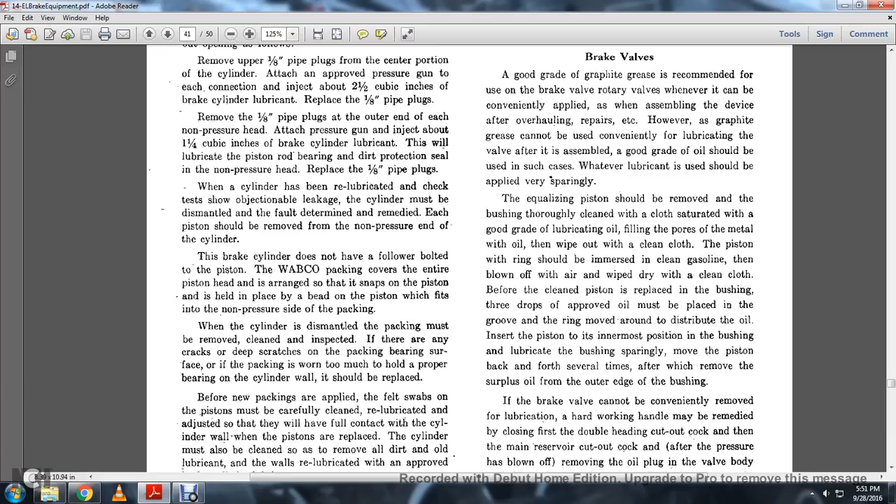Each of the pistons should be removed from the non-pressure end of the cylinder. This brake piston does not have a follower bolted on; the packing covering the entire piston head is arranged so that it snaps onto the piston and is held in place by a bead on the piston which fits into the non-pressure side of the packing.

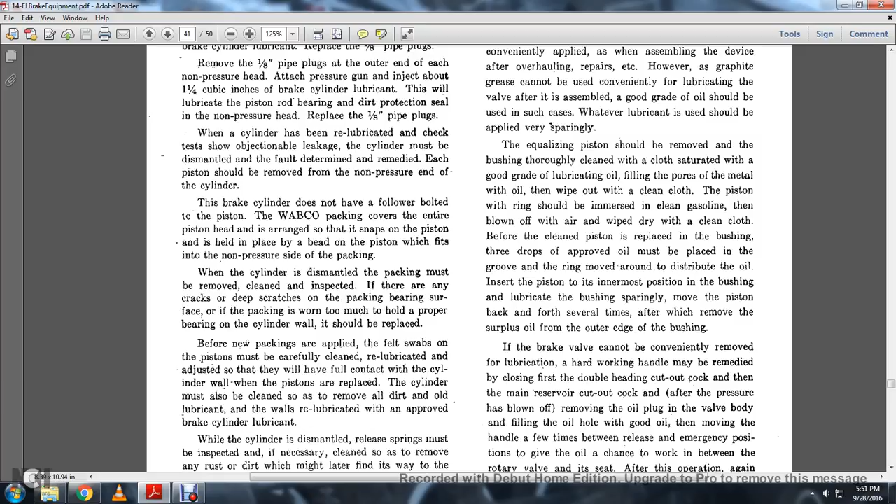When the cylinder is dismantled, the packing must be removed, cleaned, and inspected. If there are any cracks or deep scratches in the packing bearing surface, or if the packing is worn too much to hold the proper bearing on the cylinder wall, it should be replaced.

Before new packings are applied, the felt swabs on the pistons must be carefully cleaned and re-lubricated so that they will be in full contact with the cylinder wall.

When the pistons are replaced, the cylinder must be cleaned to remove all dirt and old lubricant, with the walls re-lubricated with an approved brake cylinder lubricant.

When the cylinder is dismantled, the release springs must be inspected and, if necessary, cleaned to remove any rust or dirt which might later find its way to the cylinder walls. If the springs show any rust spots, they should be coated with an approved rust preventive after cleaning.

Dirty strainers should be taken to the shop for inspection, cleaning, and reconditioning, and replaced as necessary. If the seal rings are not tight on the piston rods, they may need to be replaced.

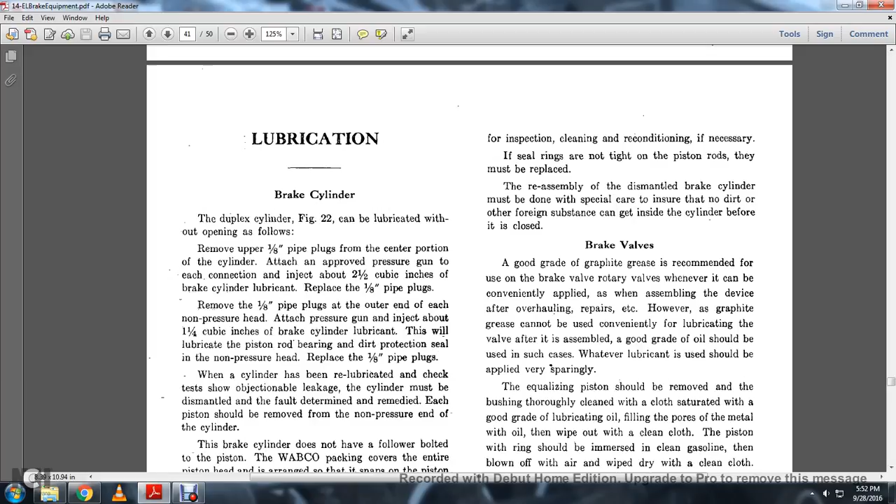In reassembly of the dismantled brake cylinder, special care must be taken to ensure that no dirt or other foreign substances can get inside the cylinder before it is closed.

The brake valve: a good grade of graphite grease is recommended for use on the brake valve rotary valves whenever it can be conveniently applied, as when assembling the device after overhauling and repairs. However, this graphite grease cannot be used conveniently for lubricating the valve.

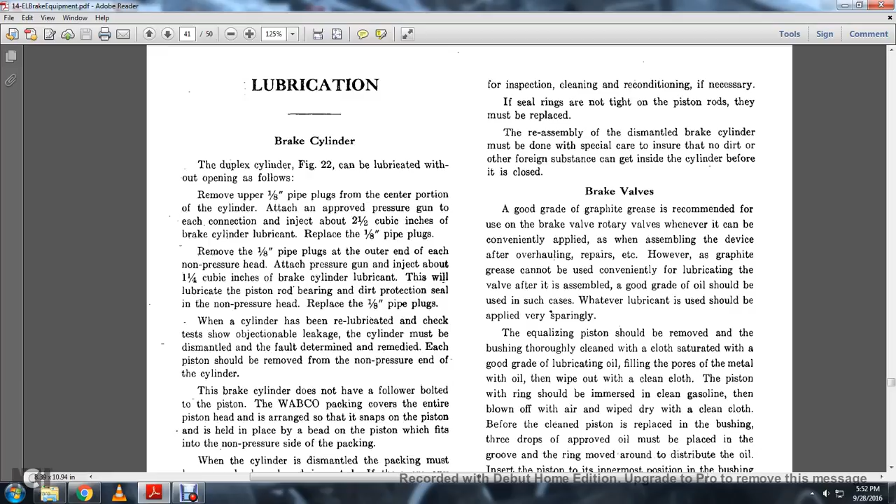In the rotary valve assembly, a good grade of oil should be used. Whatever lubricant is used should be applied very sparingly. The equalizing piston should be removed and the bushing thoroughly cleaned with a cloth saturated with a good grade of oil.

Lubricate and fill the pores of the metal with the oil while wiping out and cleaning with a cloth. The piston and ring shall be immersed in clean gasoline, blown off with air, and wiped dry with a clean cloth before the clean piston is replaced.

Within the bushing, three drops of approved oil must be placed in the groove, and the ring moved around to distribute the oil.

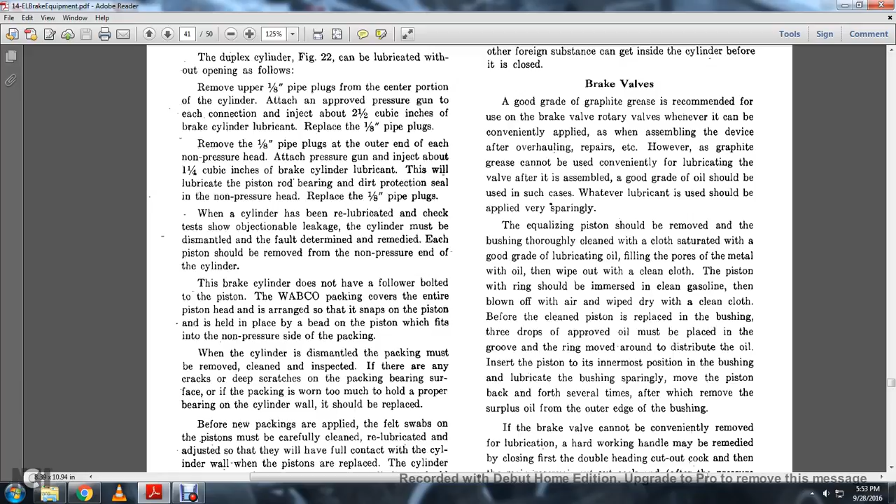Insert the piston to its innermost position in the bushing, lubricated with the oil, and sparingly move the piston back and forth several times, after which remove the surplus oil from the outer edge of the bushing. If the brake valve handle works hard and cannot be conveniently removed for lubrication, this may be remedied.

Close the first double heading cutout cock, then the main reservoir cutout cock, and after the pressure has been blown off, remove the oil plug from the valve body, filling the oil hole with a good oil. With the handle removed, move it a few times between the release and emergency positions to give the oil a chance to work in between the rotary valve and the seat. After this operation, again fill the oil hole and replace the oil plug.

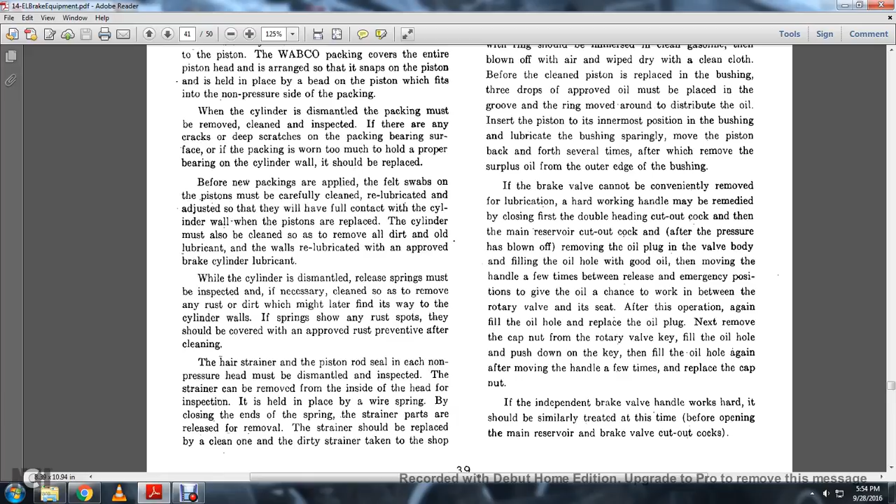Next, remove the cap nut on the rotary valve key, fill the oil hole, push down the key, then fill the oil hole again. After moving the handle a few times, replace the cap nut. If the independent brake valve handle works hard, it should be similarly treated before opening the main reservoir and brake valve cutout cocks.

All cleaning and oiling should be done at a bench by a competent man, since the liability of damaging the internal parts of the valve is least. Any attempt to take the valve apart while still on the locomotive almost certainly results in a large percentage of valves being injured by careless handling or dirt getting inside the valve.

Repairs, if necessary, should be returned to our shop for this purpose. Our facilities for doing this work and maintaining standards are the best. We can therefore do it more quickly and accurately, and guarantee better satisfaction than if handled by other shops not so well equipped.

Furthermore, it is of the utmost importance that the manufacturer's standard not be departed from for the other parts of the apparatus, in order that they be perfectly interchangeable.

The proper specified cleaning period of the distributing valve is best determined by each particular case, with careful inspection. Where conditions are severe and the distributing valve is exposed to extremes of weather, dirt, and so on, shorter intervals will be required for oiling and testing. Where conditions are more favorable, but under the most severe conditions, the interval should not be larger than 3 months.

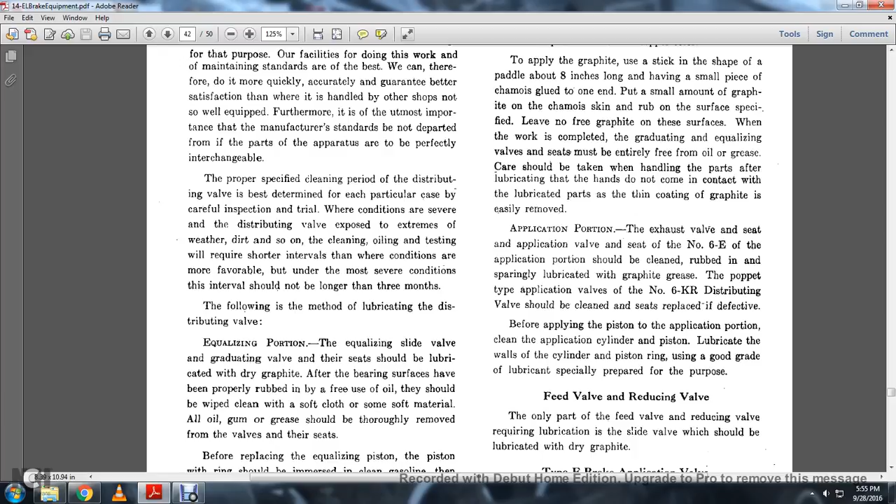The following is the method of lubrication of the distributing valves. Equalizing portion: the equalizing slide valve, the graduating valve, and their seats shall be lubricated with dry graphite after the bearing surfaces have been properly rubbed with free use of oil, then wiped clean with a soft cloth or similar material.

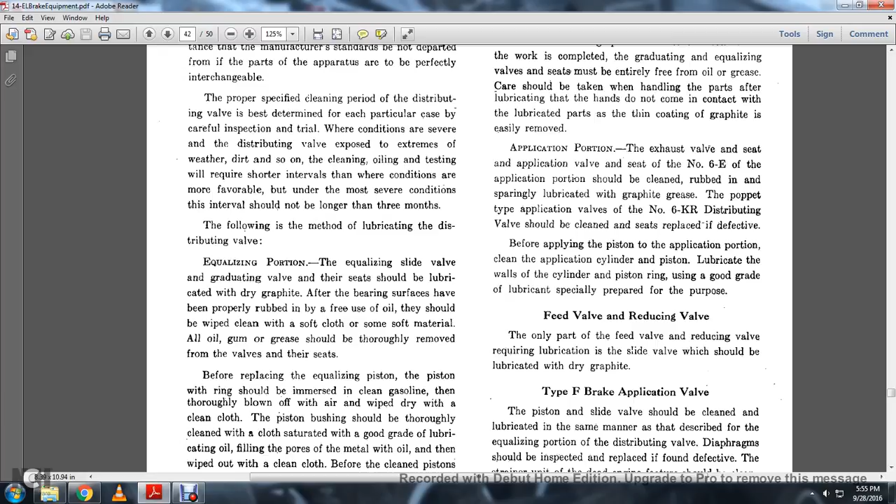Oil, gum and grease should be thoroughly removed from all the valves and their seats. Before replacing the equalizing piston, the piston ring should be immersed in clean gasoline, then thoroughly blown off with air and wiped dry with a clean cloth.

The piston bushing should be thoroughly cleaned with a cloth saturated with a good grade of lubricating oil, filling the pores of the metal with oil, and then wiped with a clean cloth.

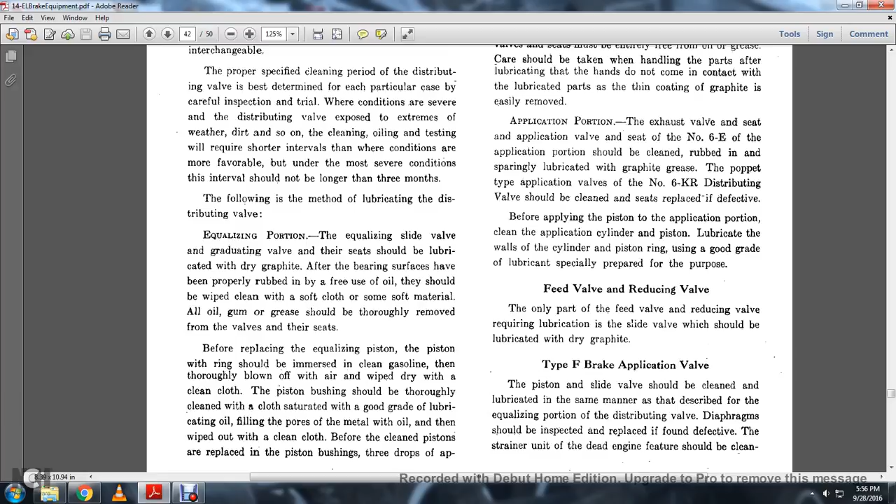The face of the graduating valve, both upper and lower face of the equalizing valve, and the equalizing valve seat, and the upper portion of the bushing where the equalizing valve spring bears, should be lubricated with a high grade of very fine, dry, pure graphite, rubbing it in until the parts show a dark copper color.

To apply the graphite, use a stick shaped like a paddle, about 8 inches long, with a small piece of chamois glued to one end. Put a small amount of graphite onto the chamois skin and rub it on the surface, taking care to leave no excess graphite on the surfaces.

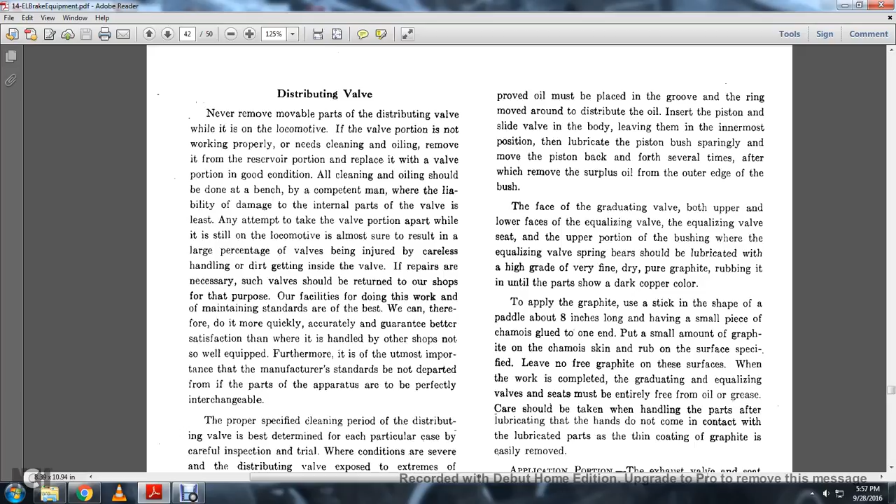When the work is completed, the graduating and equalizing valve seats must be entirely free of oil and grease. Care should be taken so that when handling the parts, the hands do not come in contact with the lubricated parts, as the thin coating of graphite is easily removed.

The application portion: the exhaust valve and its seat, and the application valve with the seat of the number 6E application portion, should be cleaned and sparingly lubricated with graphite grease. The poppet type of application valve with the number 6-KR distributing valve should be cleaned, or the seat replaced if defective, before applying the piston of the application portion.

Clean the application cylinder and piston. Lubricate the walls of the cylinder, piston, and piston rings, using a good grade of lubricant specially prepared for the purpose.

The feeding valve and reducing valve: the only part of the feed valve and reducing valve requiring lubrication is the slide valve, which should be lubricated with dry graphite. The Type F brake application: the piston and slide valve should be cleaned and lubricated in the same manner as described for the equalizing portion.

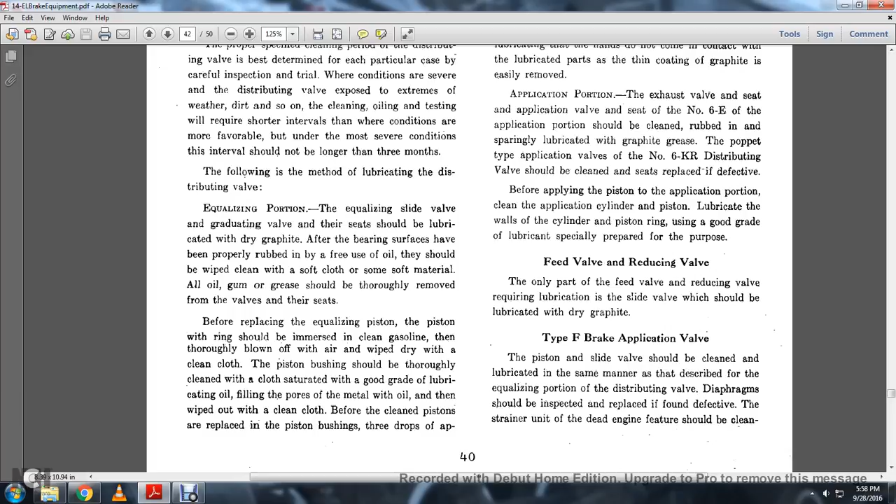The distributing valve diaphragm should be inspected and replaced if found defective. The strainer and the unit of the dead engine feature should be cleaned, and also the double check valves. If the double check valve end seals are defective, they should be replaced.

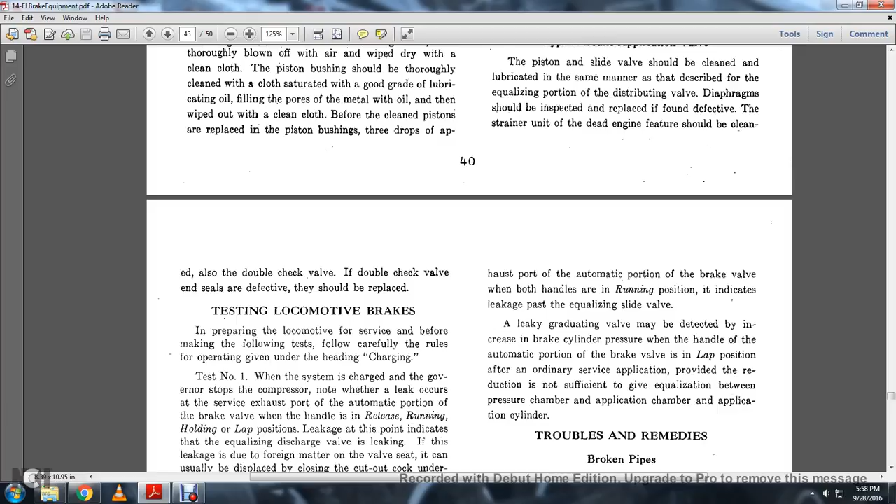Testing locomotive brakes. In preparing a locomotive for service, before making the following tests, carefully follow the operating rules given under the heading of charging.

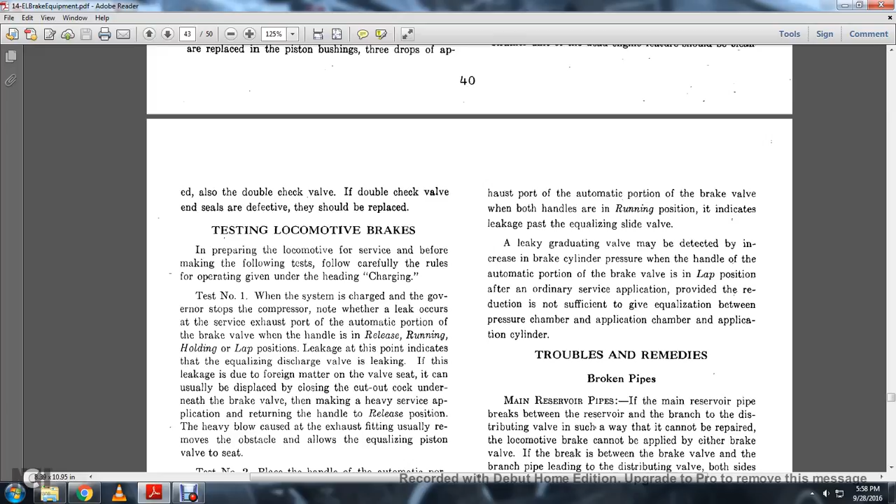Test number 1: the system is charged and the governor stops the compressor. Note whether leakage occurs at the service exhaust port of the automatic portion of the brake valve, with the handle in release, running, or lap position. Leakage at this point indicates the equalizing discharge valve is leaking. If due to foreign matter on the valve seat, it can usually be dislodged by closing the cutout cock underneath the brake valve, making a heavy service application, then returning the handle to release position. The heavy blow through the exhaust usually removes the obstacle and allows the equalizing piston valve to seat properly.

Test number 2: place the handle of the automatic portion of the brake valve in service application position. Allow it to remain until brake pipe pressure is entirely exhausted, as indicated by the gauge, then place the handle in lap position. Note if there is leakage past the rotary valve, which will be indicated by a blow.

An increase in brake pipe pressure will cause a blow at the service exhaust port. It will increase the equalizing reservoir pressure, causing the equalizing reservoir gauge to register an increase, raise pressure in the application chamber of the distributing valve, and cause an increase in brake cylinder pressure or an intermittent blow at the safety valve.

Test number 4: if after a service application the locomotive brakes release, air leaking from the application cylinder pipe, leakage at the brake cylinder exhaust port of the distributing valve while the locomotive brakes are applied, indicates a leaky exhaust valve. An increase in pressure above that put into the brake cylinder at the time of application, blowing at the safety valve, should indicate that the application valve is leaking, and should there be a blow at the

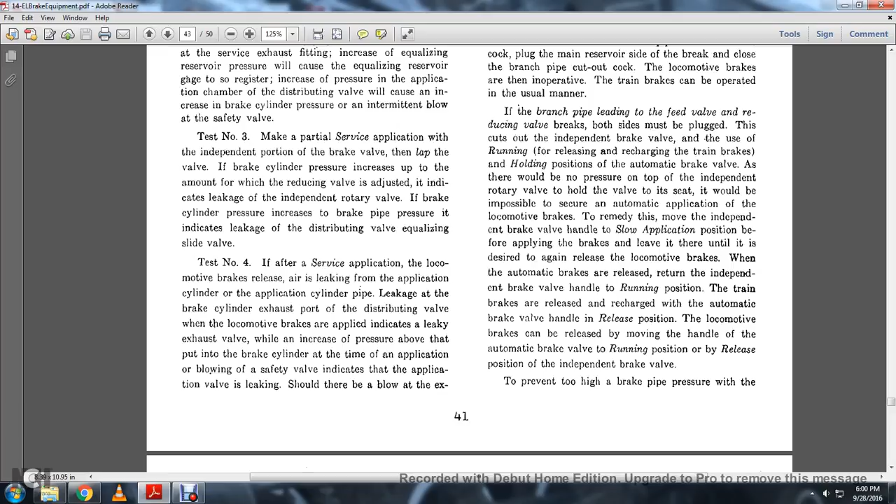exhaust of the automatic portion of the brake valve when both handles are in running position, it indicates leakage past the equalizing slide valve.

A leaking graduating valve may be detected by an increase in brake cylinder pressure after placing the handle of the automatic portion of the brake valve in lap position following an ordinary service brake application, provided the reduction is insufficient to give equalization between the pressure chamber and the application cylinder.

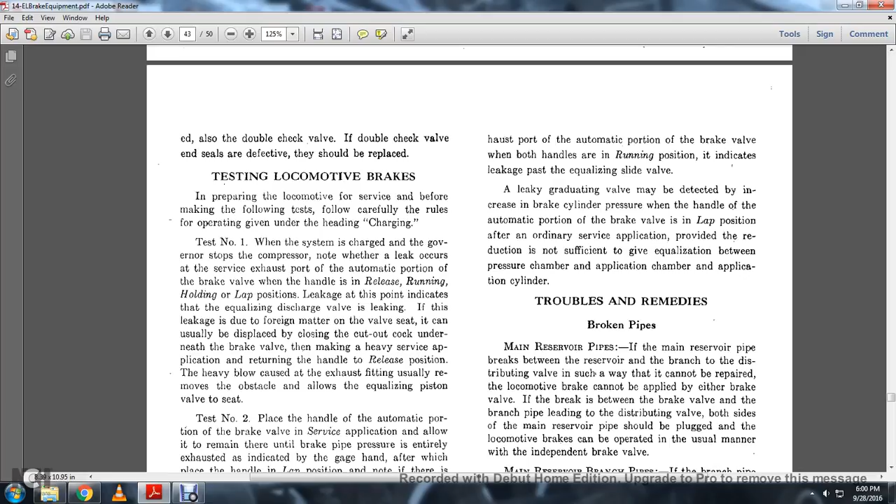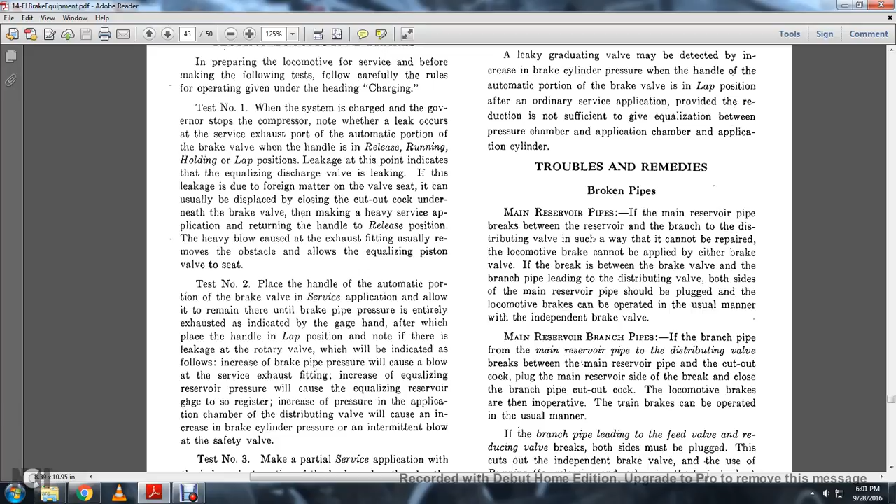Troubles and remedies: broken pipes. The main reservoir pipe: if the main reservoir pipe breaks between the reservoir and the branch to the distributing valve in such a way that it cannot be repaired, the locomotive brake cannot be applied by either the automatic or independent brake valve. Both sides of the main reservoir pipe should be plugged, and the locomotive brakes can then be operated in the usual manner with the independent brake valve.

The main reservoir branch pipe: if the branch pipe from the main reservoir pipe to the distributing valve breaks between the main reservoir pipe and the cutout cock, plug the main reservoir side of the break and close the branch pipe cutout cock. The locomotive brakes are then inoperative, but the train brakes can be operated

in the usual manner. If the branch pipe leading to the feed valve and reducing valve breaks, both sides must be plugged. This cuts out the independent brake valve and the use of the running position for release and recharging of the train brakes.

With the automatic brake valve in hold position, there would be no pressure on top of the independent rotary valve to hold the valve on its seat, making it impossible to secure an automatic application of the locomotive brakes.

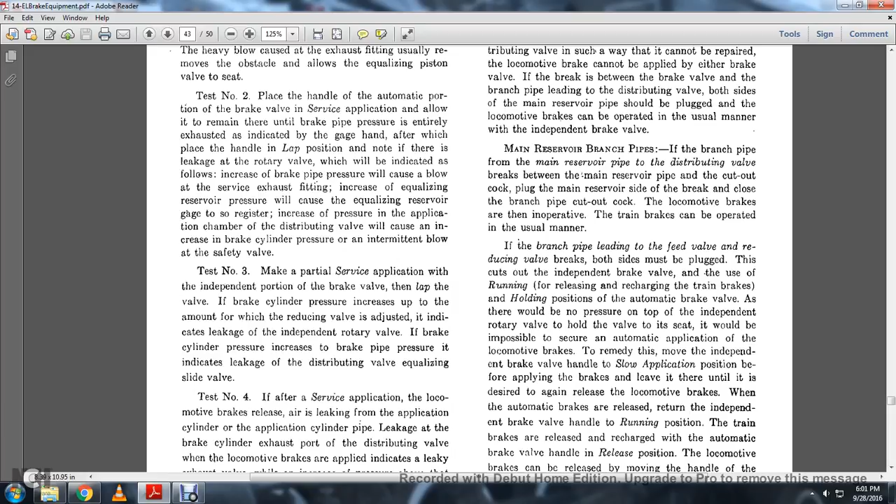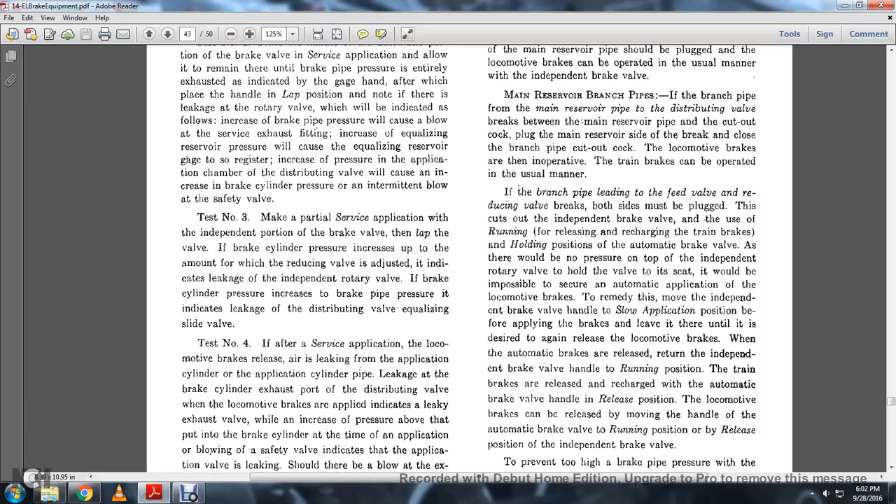To remedy this, move the independent brake valve handle to slow application position before applying the brakes, and leave it there until it is desired again to release the locomotive brakes. When the automatic brakes are released, return the independent brake valve handle to running position. The train brakes are released and recharged with the automatic brake valve handle in release position. The locomotive brakes can be released by moving the handle of the automatic brake valve to running or release position, or by the independent brake valve.

To prevent too high brake pipe pressure with the automatic brake valve handle in release position, the compressor must be stopped by means of the control switch.

If the break occurs between the reducing valve and the branch piping leading to the feed valve, plug both sides of the pipe. This cuts out the independent brake valve but does not interfere with the handling of the locomotive and train brakes using the automatic brake valve, except that the independent brake valve must be manipulated as described in the preceding paragraph.

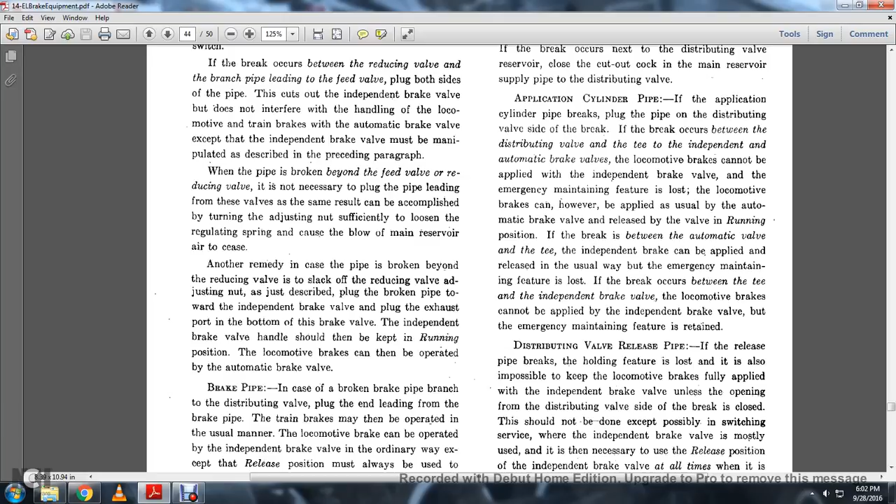When the pipe is broken beyond the feed valve or the reducing valve, it is not necessary to plug the pipe leading from the valves. The same result can be accomplished by turning the adjusting nut sufficiently to loosen the regulating spring, to cause the blow of the main reservoir air to cease. Another remedy in case the pipe is broken beyond the reducing valve is to slack off the reducing valve with the adjusting nut, as just described.

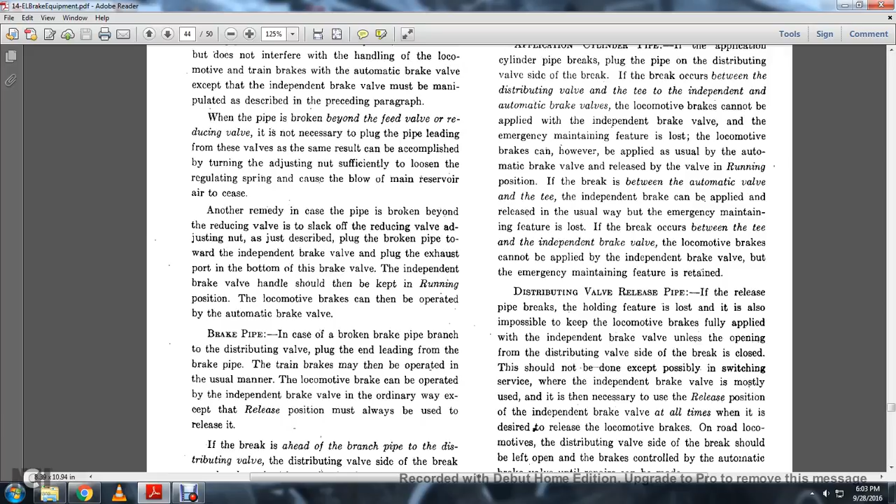For the brake pipe, in case of a broken brake pipe branch, plug the distributing valve at the end leading from the brake pipe, and the train brakes may be operated in the usual manner. The locomotive brakes can be operated with the independent brake valve in the ordinary way, except that the release position must always be used to release it.

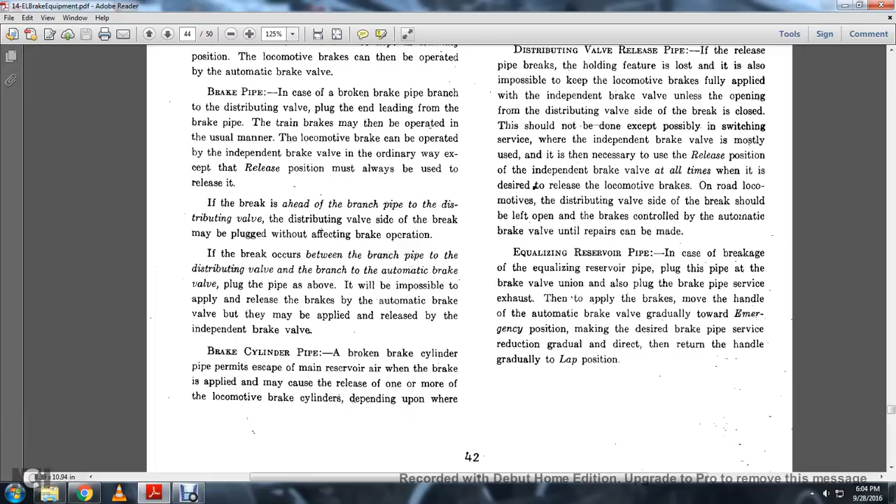Brake cylinder pipe: a broken brake cylinder pipe permits the escape of the main reservoir air pressure for the brake, and may cause the release of one or more locomotive brake cylinders depending on where the break occurs.

If the break cannot be repaired, close the cutout cock of the pipe leading from the break to the distributing valve, or close the cutout cock of the main reservoir supply pipe to the distributing valve as necessary.

Application cylinder pipe: if the application cylinder pipe breaks, plug the pipe on the distributing valve side of the break. If the break occurs between the distributing valve and the tee to the independent and automatic brake valve, the locomotive brakes cannot be applied with the independent brake valve, and the emergency maintaining feature is lost.

The locomotive brakes can, however, be applied usually by the automatic brake valve, released by the valve in running position. If the break is between the automatic valve and the tee, the independent brake valve can be applied and released in the usual way, but the emergency maintaining feature is lost.

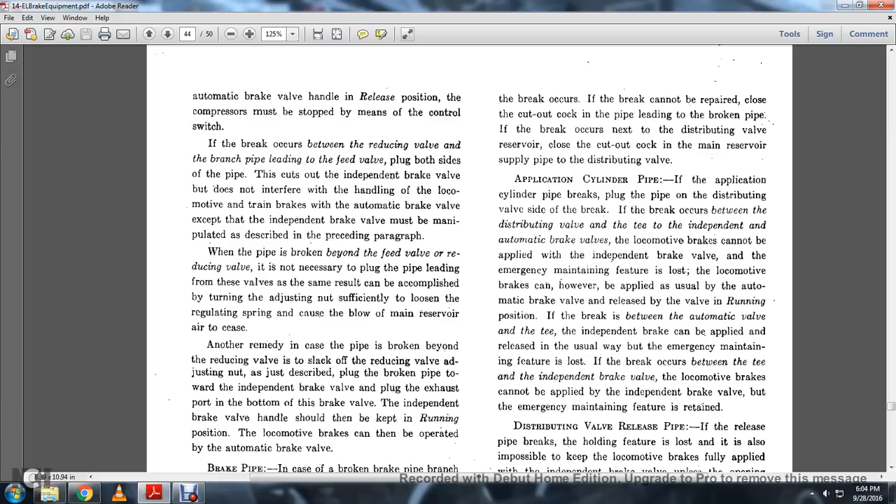If the break occurs between the tee and the independent brake valve, the locomotive brakes cannot be applied with the independent brake valve, and the emergency maintaining feature is retained.

Distributing valve release pipe: if the release pipe breaks, the holding feature is lost, and it is also impossible to keep the locomotive brakes fully applied with the independent brake valve unless the opening on the distributing valve side of the break is closed. This should not be done except possibly in switching service, where the independent brake valve is mostly used.

It is necessary to use the release position of the independent brake valve at all times when it is desired to release the locomotive brakes. On the road locomotive, the distributing valve side of the break should be left open, and the brakes should be controlled by the automatic brake valve until repairs can be made.

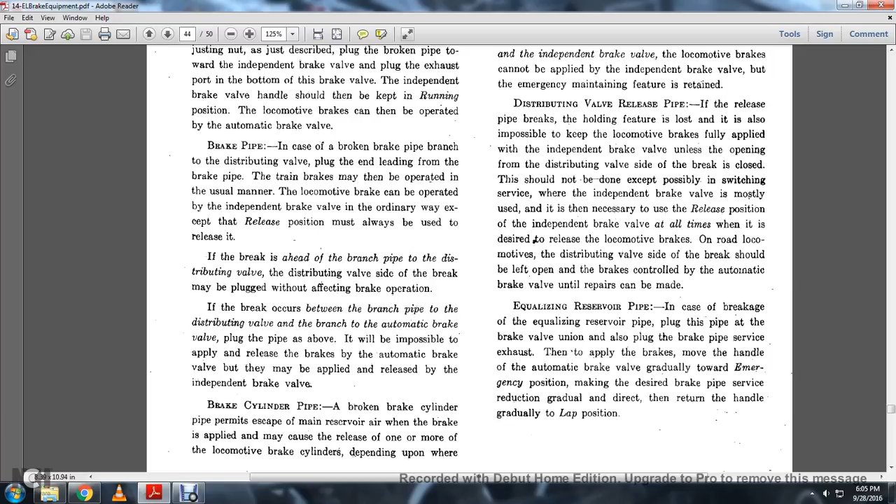For the equalizing reservoir pipe, in case of breakage, plug the pipe at the brake valve union. Also plug the brake pipe service exhaust, then apply the brakes and move the handle of the automatic brake valve gradually toward the emergency position, making the desired brake pipe service reduction gradually. Then return the handle gradually to the lap position.

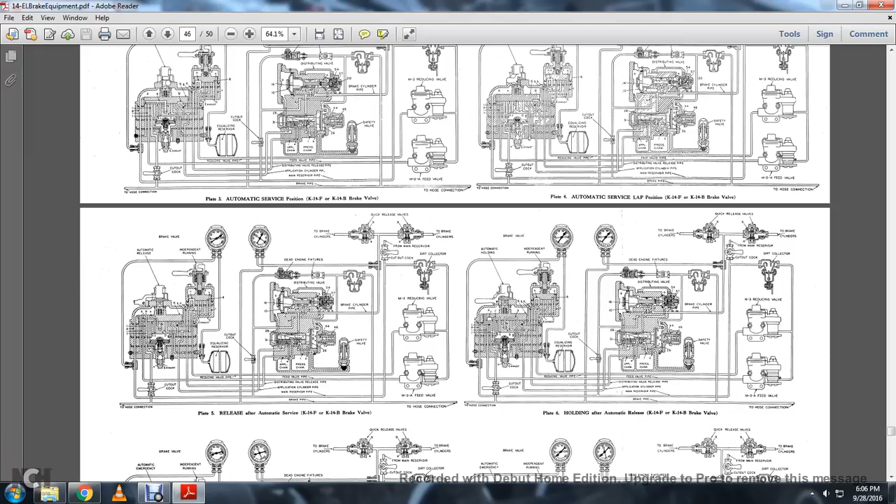And then there are the couple diagrams, like the release and running position, automatic service position, automatic service lap position, release, automatic service, release holding, automatic release, emergency position, emergency lap position, independent application position, independent lap position, independent release position, independent release, independent application.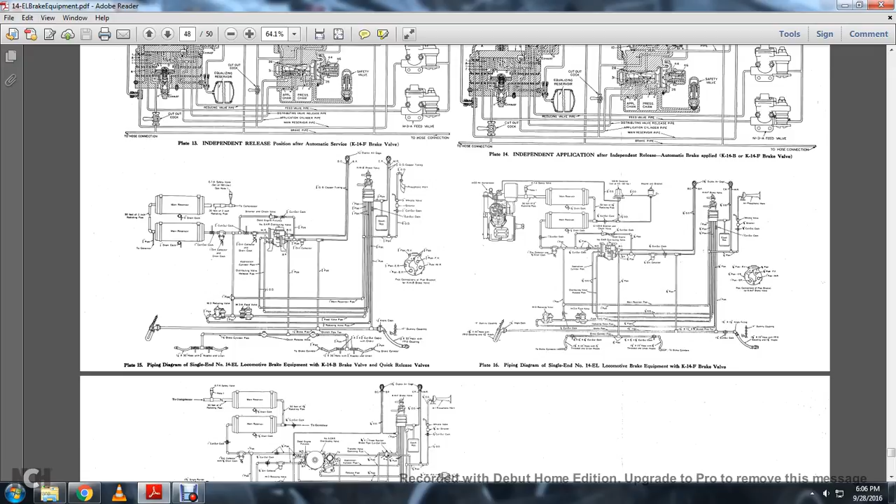Another diagram, I'm planning on going over these in another video, but not for this one, not now.

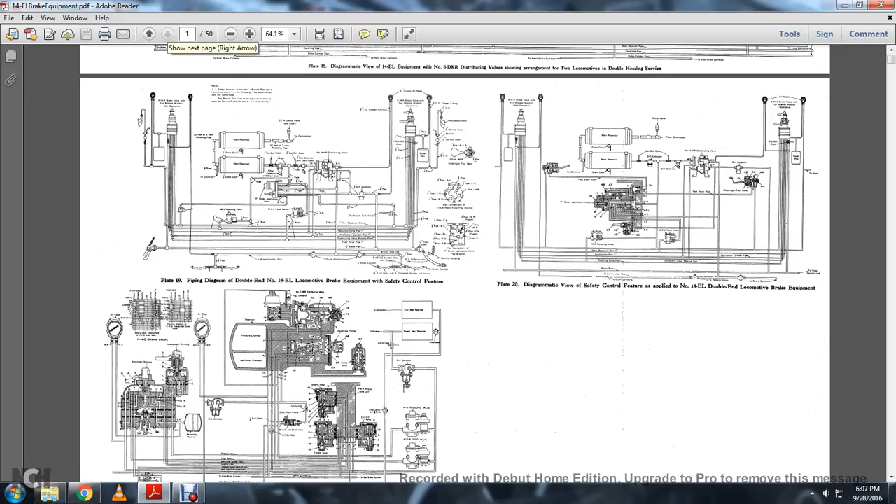And that takes care of... this takes care of the number 14 brake equipment for diesel electric switching locomotives.